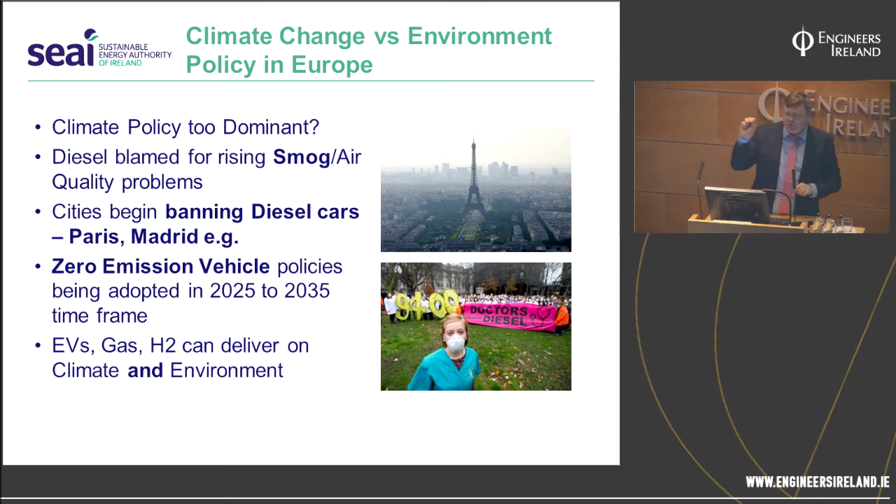They can all contribute to climate change and reduce the environmental impact and improve the air quality aspect. So what are the immediate things that the EU has started to do?

The first thing is there was a debate about how realistic the test cycles were. On the top graph, any vehicle built before 2017 was tested according to the new European drive cycle, with urban cycles and an extra urban cycle, where average speed doesn't get much beyond 60 kilometers an hour. So when you bought your car, it was tested according to this rigorous cycle. It was noticed that actual emissions were deviating by about 30%, and in particular NOx was deviating by a factor of 4 or 5 in some cases.

So the EU decided to change this and introduce a new, more real-world test cycle. In addition, after the vehicle has done that test cycle, they take it around and stick a device on the tailpipe to measure real-world emissions. Some deviation is allowed - post 2021, a deviation of 50% will be tolerated, but before then a higher deviation is allowed.

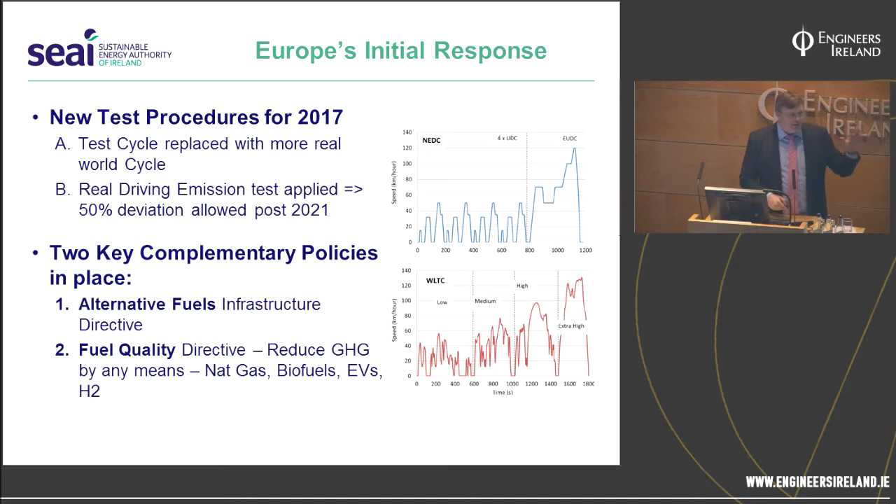The second thing is the Fuel Quality Directive has now been expanded. Basically, anybody supplying fuel for transport has to reduce the greenhouse gas content in that fuel - they don't care how, whether through a combination of natural gas, biofuels, EVs, or hydrogen. Those are the two things they'll be looking to get change happening with over the next couple of years. So let's look specifically now at EVs and how they fit into this equation.

We have an illustration of the energy efficiency of these vehicles. At the top we see the diesel vehicle, with typical efficiencies in the region of 25% - so the actual useful energy you get out in terms of transporting the vehicle, about 25% of the diesel energy put into it.

If we look at the electric vehicle, the power station combination - representing renewable energy, natural gas, coal, or whatever - has an average efficiency of about 45%. About 10% is lost transmitting that electricity to the consumer, but the electric vehicle itself is hugely energy efficient, with regenerative braking, and the battery itself is also highly energy efficient. Overall, you total that up and get about 30%.

So we can say that the electric vehicle, if we make the grid cleaner each year, will have emissions that reduce each year. The diesel car, as it ages, will have emissions that rise each year as it gets less energy efficient. So with this car, each year there's the potential to have fewer and fewer CO2 emissions associated with it - that's excellent news.

An illustration here of hydrogen, just for completeness. In Ireland, you have two ways: you either manufacture the hydrogen from gas or from coal, or you make it from electrolysis. Since we don't have huge reserves of gas or coal, if made from electrolysis, this is the kind of efficiency you'd get. Then you've also got to compress that stuff up to about 700 bar to get it into the car. The fuel cell is less efficient than the electric vehicle.

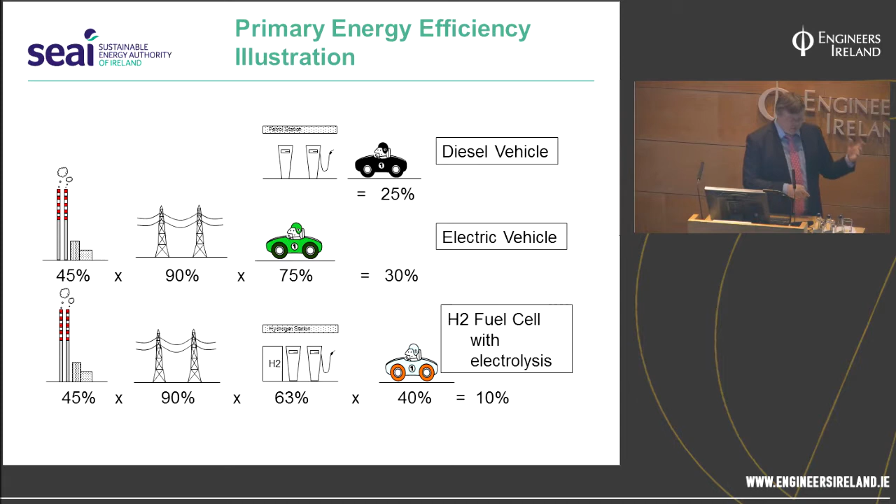So we're not going to talk about this, we're going to talk about electric vehicles now. We're going to look at some of the technology, just the basics really.

So this is a lithium ion cell. We have our anode here on the side, the cathode over here. In discharging mode, what we have is a graphite crystal almost, shown here to represent a crystal structure. The lithium ions are actually inside the crystal structure. If you had something like a lead battery, the actual electrode, all the action is happening on the surface, and the electrode gets dissolved in the process. This thing stays in place here.

The ions, so what happens is you've got two chemistries here. You've got the lithium carbon chemistry here, and over on the other side then you've got something like permanganate. So they've got two different electrode potentials. The electrons want to move across to this side to complete the reaction, but they can't move through the electrolyte, so they have to move outside the circuit to complete it over here. So once you turn the tap on here and make the connection, the electrons start to flow this way, the ions start to move across here, complete the reaction on this side, and that's discharge.

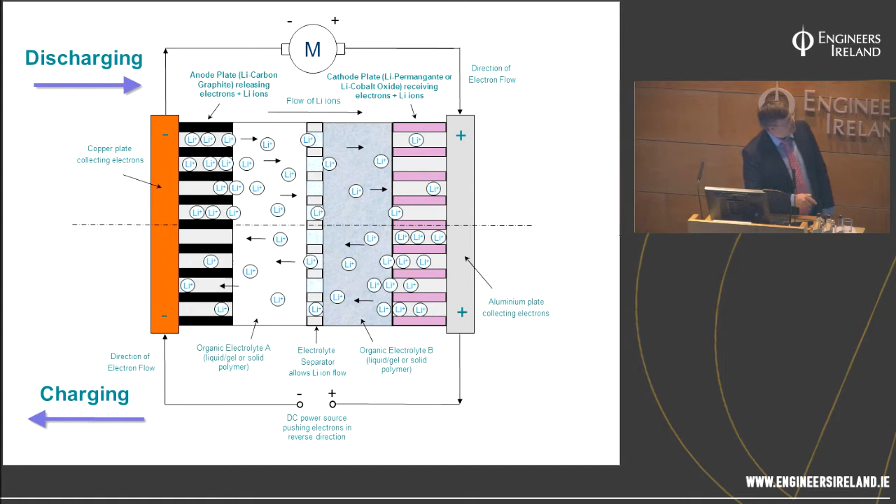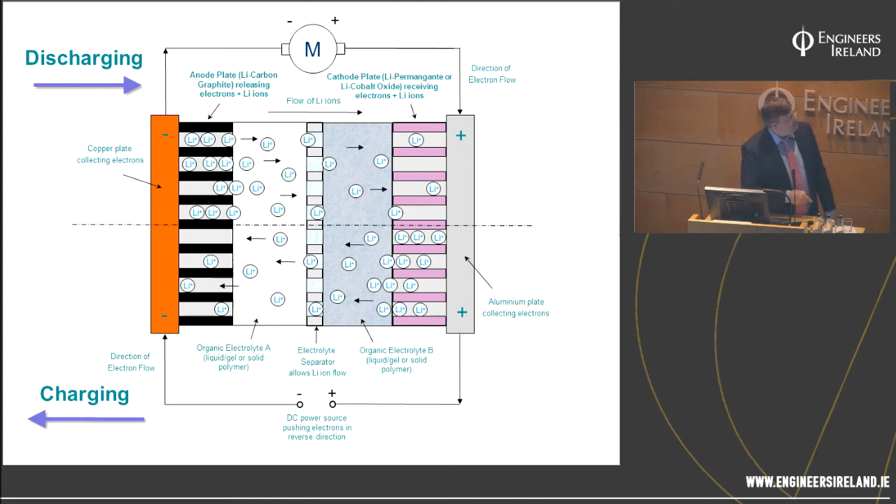So again, you have another metallic crystal on this side, going inside the crystal structure itself. And then when you want to charge it, you attach a voltage in the opposite direction across it here, and this drives the positive current this way. So the positive current is going that way, the electrons are going that way, and in charging you're going in the opposite direction, and they fill up again here. And this process happens to be very efficient, so it makes the lithium-ion batteries very efficient.

So if we look here, in terms of the cell voltage, the basic chemistry, each cell is able to create about 3.6 volts, as opposed to 2 for a lead acid. Voltage is energy per charge, so that means you're almost sending twice the energy for each electron that goes down the wire. So it reduces the losses and all sorts of things within the battery itself - the I-squared losses can be lower and things like that.

In terms of energy efficiency, if we look at the round trip efficiency, the energy you're going to get back out is about 93% compared to 75% for the lead acid. In terms of depth of discharge, of the volume of energy in that, how much of it can you access? You can access 85% of what's stored in the lithium-ion battery. In the lead battery, 30 to 50%. So you're carrying around this dead weight, energy you can't access - 50% of that thing you can't get your hands on.

And then, as we said, with the electrodes being part of the chemical reaction in the lead acid battery and the processes in it, we see the number of charge-discharge cycles between 500 and 1,000 for a lead battery, between 2,000 and 5,000 for a lithium-ion battery.

And here's the other thing - lead batteries don't like to be partially charged. Once you start the process, you've got to finish it right to the end. This is not the case with a lithium battery. You can partially discharge, partially recharge, so it's far more convenient for use. And they charge a lot faster as well than the lead batteries.

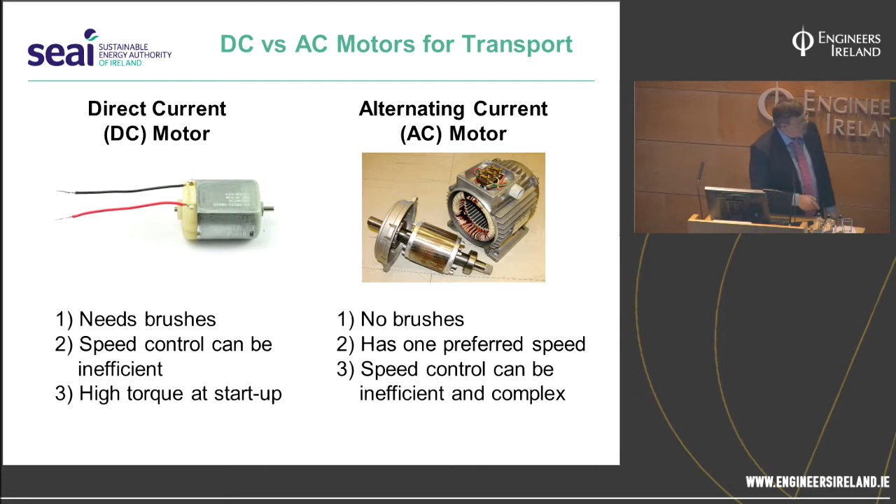So these power electronics have been developing over the last couple of years, and these are the same things that have enabled variable speed synchronous generators to be used in wind turbines as well.

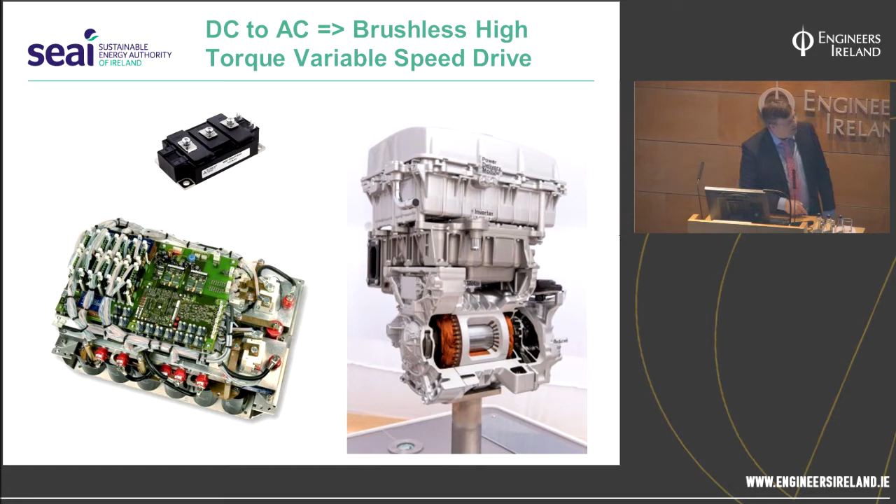Just to give you a practical example of what it looks like, this is the motor from the Tesla - this is actually, so they have all that variable speed control that you've seen there. Inside here is the rotor shaft, again very, very close. This is an induction motor, actually, so this one doesn't use rare earth magnets - they've chosen a different path. But interestingly, the new Tesla car will use rare earth magnets, so they're actually dropping their own idea, if you like.

That's what it looks like. 270 kilowatts is the power output, I tried to find a weight figure, I think it's about 32 kilograms I've seen. And just to give you a comparison, this is a 2.5 litre petrol engine - 270 kilowatts is the stated output, about 183 kilograms.

Look at the work and effort gone into building that engine there. Here are the Tesla motors installed. You can see it's a very neat power chassis, if you like. This is the actual battery pack stuck in here underneath, with two of these motors stuck in here. You can get an idea of the scale with respect to the wheel. So it's enormous power stuck in there. It's huge, very neat and tidy.

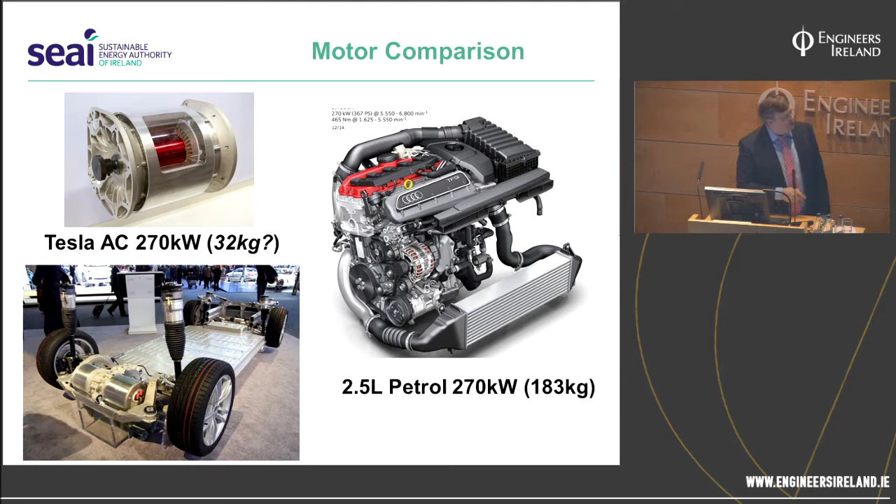So overall, you've seen what the cells look like. They shouldn't be that difficult to mass manufacture, right? There's a lot less work in building these things compared to this, so these should be cheaper as well. It's simply a question of volume. Once the volume of these vehicles gets up to a sufficient level, they're going to be far cheaper than combustion engine vehicles in the future.

So there we go, going back now to see what's going on in terms of Ireland's market. This is from SEAI's data. We've taken the average price of every Leaf that's been sold. This is the price after subsidies have been given, and we give about 10,000 in subsidies in total, so you can add 10,000 onto that to get the unsubsidized price. We see about 31,000 starting off in 2011, dropping rapidly.

Now we're looking at what's going to happen next. The other curve here is the price of the cars, and the far side is the actual NEDC driving range, the technical driving range of the cars. We started off at about 175 kilometers when the first Leaf came in. They started manufacturing it in Sunderland, cut a bit of weight out of the car, and with the same battery pack managed to get 200 kilometers out of it. Then the first increase in battery pack size gave you a 250 kilometer car.

And now the new one, coming out in January or February of next year, expected range about 378 kilometers. Not sure what the price is going to be yet. James, I hope you're going to be nice to us. You can reduce that bar anyway, I can tell you. Thanks, James, that's great.

So the man here is going to decide what this car is going to cost in the country. This car coming out in 2018 is going to have CHAdeMO fast charging. The one they're bringing out the year after, I don't know if we're going to have it in Ireland, hopefully we will, is going to be CCS, the European fast charge format. So we have a legacy of CHAdeMO, we have to accommodate those vehicles, so they're hedging their bets here. The second car coming out is going to have an even bigger battery pack, maybe 475 or 480 kilometers, we don't know yet.

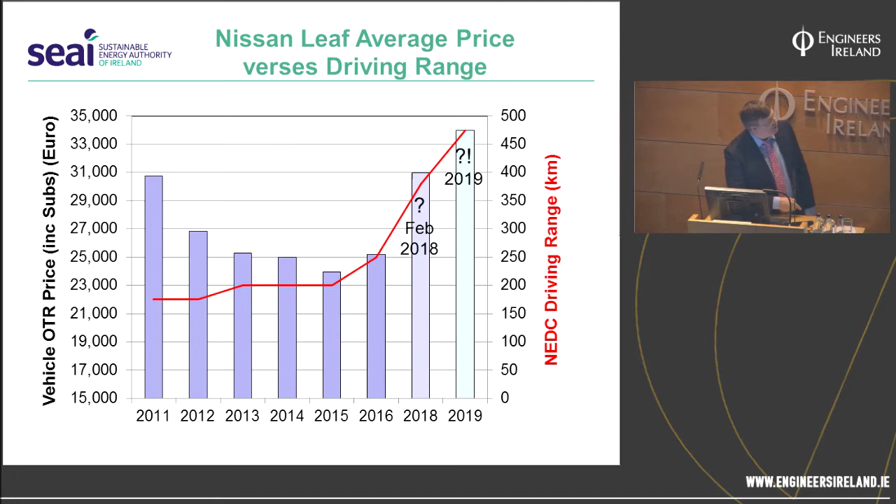So now, what's actually been happening in terms of sales in Ireland? When we say EV, we mean battery electric vehicle, but we also mean plug-in hybrid electric vehicles, and we've been given grants for both types. The BEVs are down at the bottom in blue, and the purple are the PHEVs. We've really seen growth in the PHEVs since BMW started producing their 3 Series and 5 Series in PHEV format. Up until then, it's been all the Nissan Leaf really driving the whole thing ahead.

And now we're starting to see this phenomenon: EV imports starting to rise. These are the number of registrations per annum in the country. About 3,600 cumulatively on the roads if you total it up. The split is 80-20, 80% of them battery electric vehicles, and we want to maintain that because the environmental benefit from PHEVs is uncertain. It's down to behavior, whether the guy is diligent enough to plug it in every night, whereas the BEV driver has to plug it in every night. So we're pleased with this.

Now, of course, the euro sterling exchange rate is doing the damage here. It's not just for EVs, it's also harming car sales in general in the country, as a consequence of Brexit uncertainty.

So there we have it. What are the manufacturers telling us about the future? So these are all statements from manufacturers.

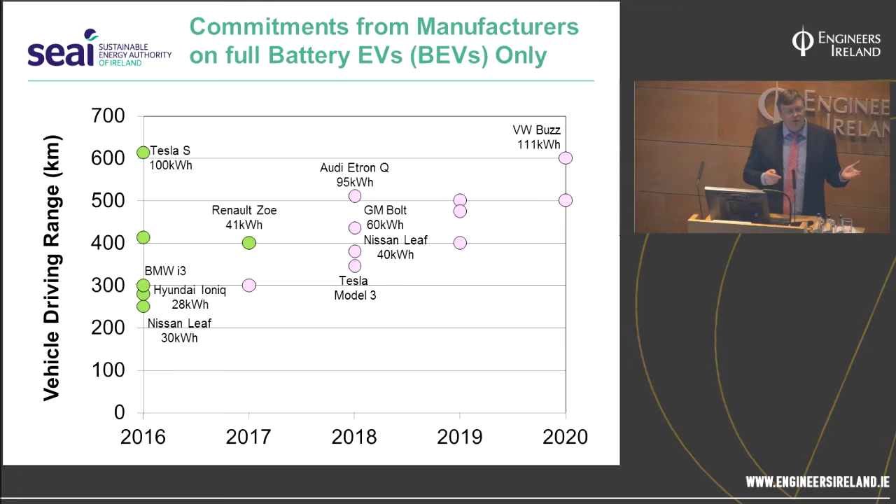So we're seeing a general trend. It's not unreasonable to assume after 2020 that the batteries are going to be in the 100 kilowatt hour range size with a driving range of 600 kilometers. So that's what we're looking at going into the future.

How fast will the cars be charged? This is the next statement again from manufacturers. So we have power here - how much power can you get into that battery - and then we have dates along the bottom. So down the bottom here, we have about, I think, 5 kilowatts here.

So if you charge your car at home, you can charge it at a rate of about 5 kilowatts, let's say. Your house is able to take about 14 kilowatts, based on a 63 amp fuse. So that's what you can do at home there, okay? The street chargers work at about 22 kilowatts, and then our current fast chargers are 50 kilowatts.

Now, the Nissan Leaf can take - most of the cars out there can work at this 50 kilowatts. We know that the Ioniq, the one that's out there on the roads, is capable of 100 kilowatts, I believe - they're using polymer batteries. But anyway, this is my own test here. I took an Ioniq and I brought it into the petrol station, nearly empty.

In 30 minutes, I got 170 kilometers range on it. I checked the computer to see did it actually come out - it all totted up fairly accurately, actually. I was really impressed.

So the proposal now is to increase the CCS and the CHAdeMO fast charging standard from 50 to 150 kilowatts. And already we see 2 manufacturers, Volkswagen and Audi, committing to vehicles that will charge at that rate. If we took that pro rata, very roughly, you're looking at a 10-minute charge for that same range, 10 minutes to get 170 kilometers.

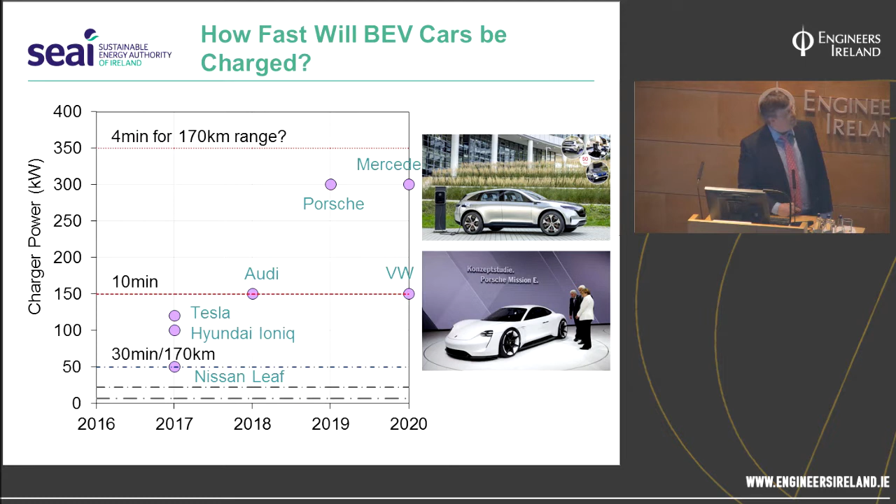So I'm not going to say any more, you'll hear a bit more from Joe now later on. And really that's it, so you got a smattering of everything there - you see what's going on, what's happening in Ireland, and where the future is taking us. So thanks very much.

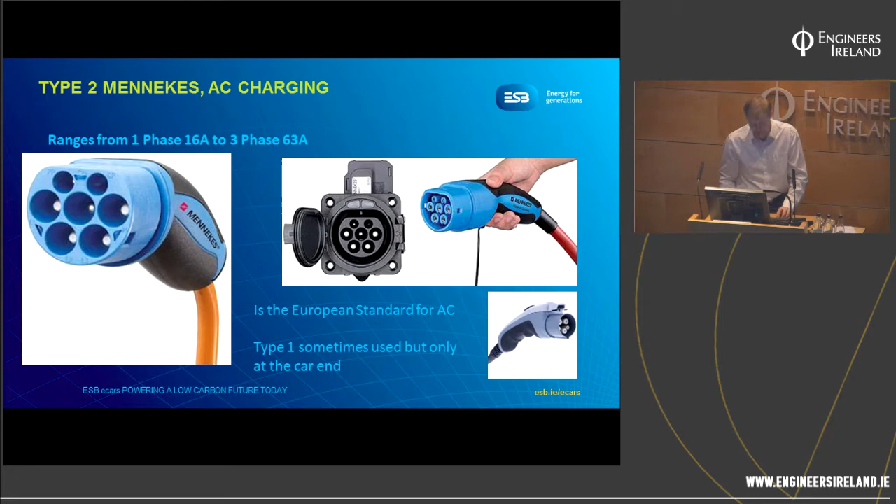Following on from that, we have the CHAdeMO connector, which was developed by the Japanese manufacturers for fast charging using DC. This was the first DC connector for EVs and was used by the Nissan Leaf, the best-selling EV with 300,000 cars around the world today.

You'll see a few variations of the CHAdeMO connector out there, as shown here. The early CHAdeMO connector from Yazaki, here on the left, was generally found to be difficult to use, but other manufacturers developed much improved versions, and today you're more likely to come across these.

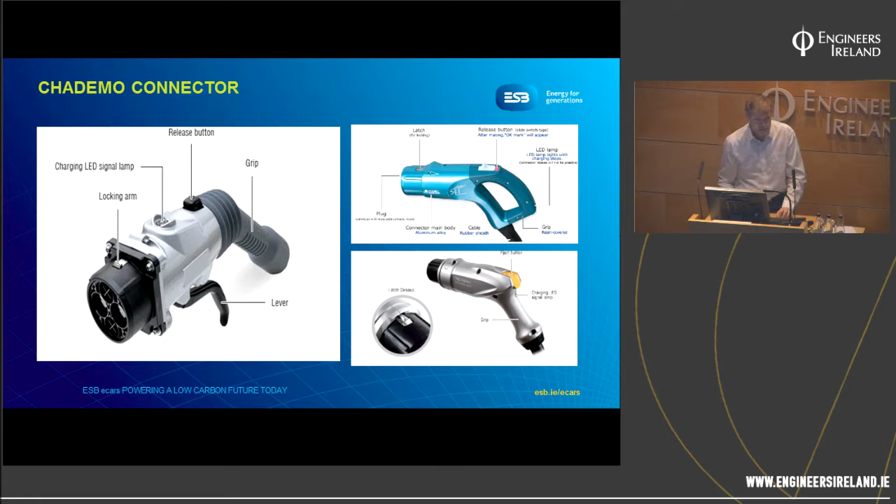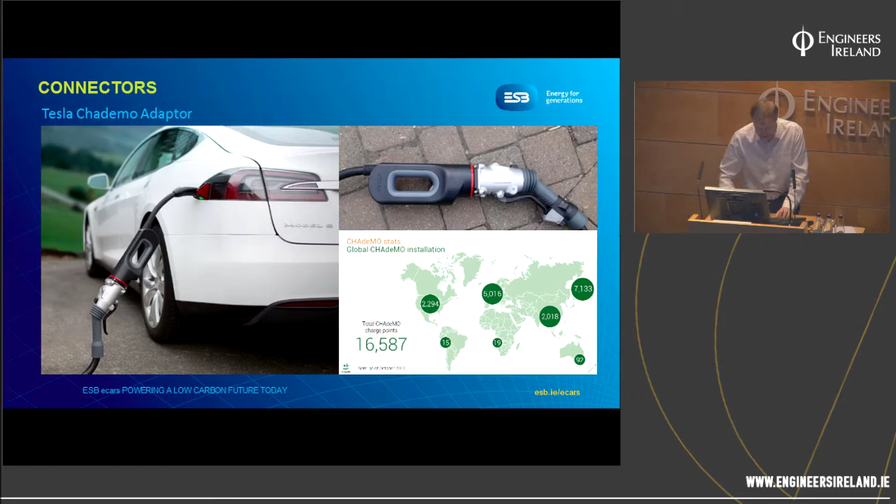Tesla, one of the main disruptors in the automotive world with regard to EVs, has developed a proprietary connector which they use themselves. So they have developed an adapter so that they can take advantage of the CHAdeMO charge point. This opens up the vast number of 50 kilowatt charge points to Tesla drivers.

Then moving on finally to CCS, or sometimes referred to as combo. As the name suggests, the connector is a combination incorporating both AC and DC. There are 2 variants, one for the European market, as Type 2 is the European AC standard, and Type 1 for the American market. This alternative to CHAdeMO is driven mainly by the German and American automakers.

The first public station appeared in June 2013 in Wolfsburg, installed by the Volkswagen Group. In Ireland, ESB introduced CCS back in 2015.

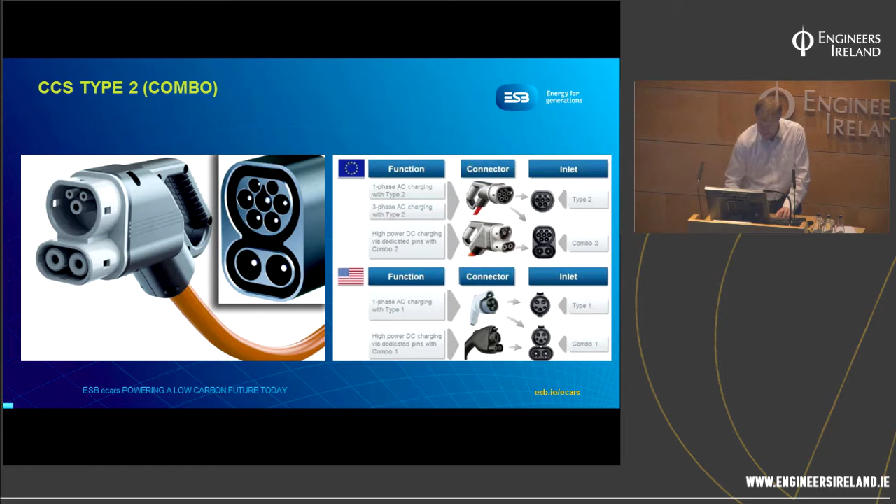So in Ireland, when we started introducing CCS to our network, we took the decision of applying multi-standard stations which could support both CCS and CHAdeMO, as well as fast AC. The reasons behind this is because we wanted to continue to support all EVs, and this has been the trend across Europe.

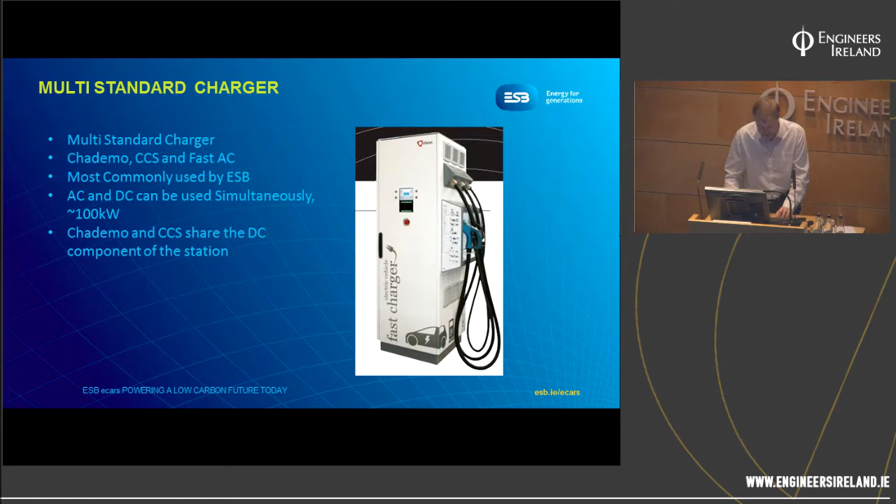Now, just to move on to what's coming down the line, in terms of the future for EVs. Battery energy density has been increasing, while at the same time the cost has significantly dropped since 2009. Putting that into context, in 2010 the Nissan Leaf was launched, and at that time the cost of a kilowatt hour was just under $1,000.

Today that's under $150. This can be seen reflected also in the battery capacity changes in EVs currently in the market, with kilowatt hours increasing within the same physical body of these cars.

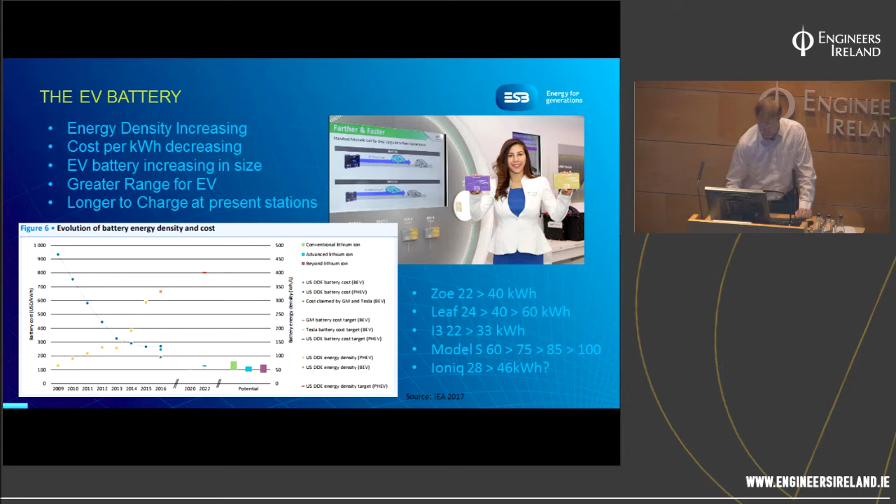Now, with bigger batteries, charging times at the current power levels will grow. So there's been a trend moving towards higher power charging. And currently Tesla's superchargers provide power levels of 100 to 130 kilowatts.

The CHAdeMO standard is moving to increase and will be capable of providing 100 to 150 kilowatts, with CCS also looking at going to 350 and even 400. At these higher levels, charging times close in on the time taken fueling a diesel or petrol car.

One of the biggest challenges for the manufacturers in getting to this was the cable that goes between the station and the EV itself, which would not only need to deliver the high power levels, but also had to be light, flexible, and sufficiently cool to handle for the user. Thus, this drove the need for higher voltages as well as high currents and now liquid cooling.

The other problem being faced as EV numbers grow is the number of points available at a site. Most of them today would only have 1 or 2 fast points, leaving little or no room for redundancy and increasing the likelihood of long waits. So, along with the move to higher power, these next generation chargers are moving towards multi-points and dynamic power management. Due to this and other reasons, the power components are being separated from that of the customer terminal.

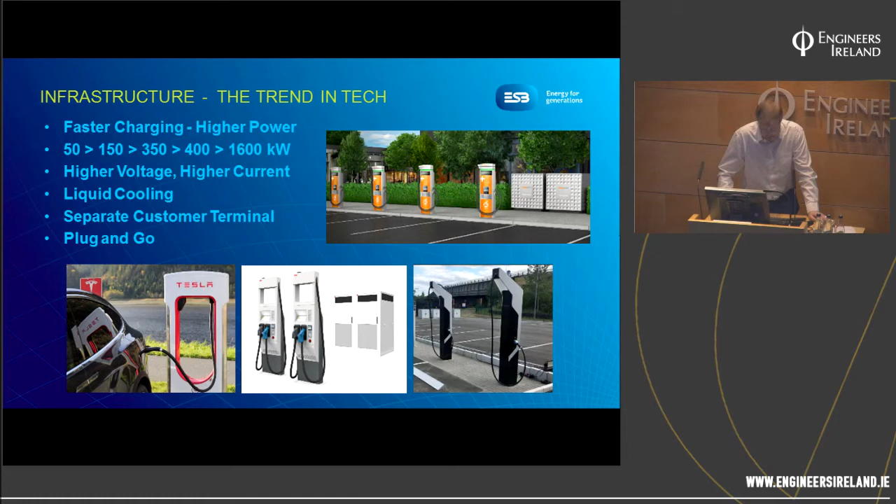Now, infrastructure for larger vehicles. There has been a number of projects like that of the E-Highway by Siemens, run in California and Sweden, using overhead contact lines and hybrid electric trucks with pantographs, connecting to power them while on the move at speeds up to 90 kilometers per hour.

In this area also of electric buses and BRTs being developed, with stationary pantograph charging systems operating at levels of 150 kilowatts to 600 kilowatts, providing for today's demands for clean air in our cities.

And most recently, Tesla unveiled the Tesla Semi, along with their plan to provide mega chargers worldwide. These are expected to be in the order of 800 to 1600 kilowatts per point.

And finally, just to touch on wireless charging of EVs. Wireless charging has been around for a while. We all know the humble electric toothbrush, and we're also starting to see it becoming available on new mobile phones.

This is an area where automakers have begun to offer vehicles equipped with wireless charging. While it is unlikely to be coming to public infrastructure in the short term, it will begin to appear in people's homes with the convenience it provides.

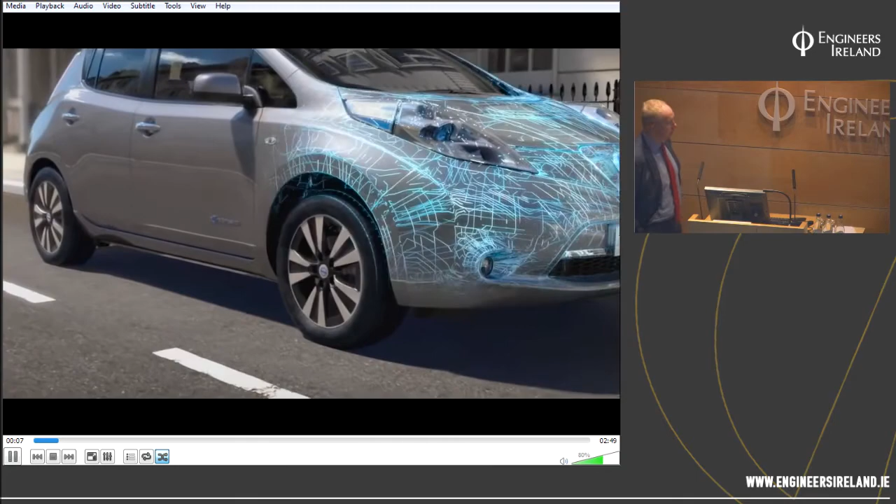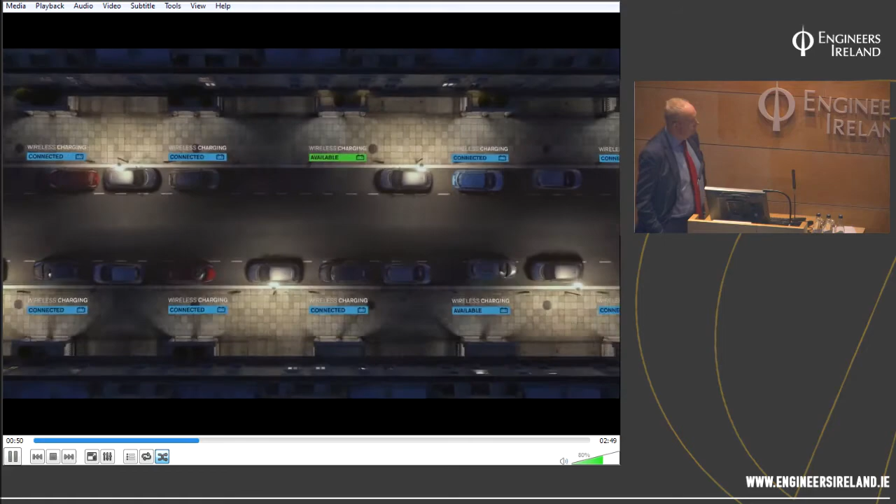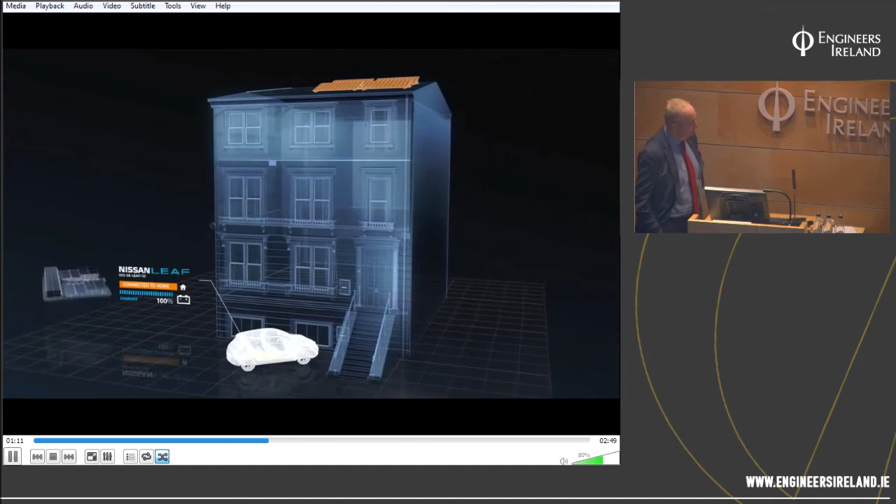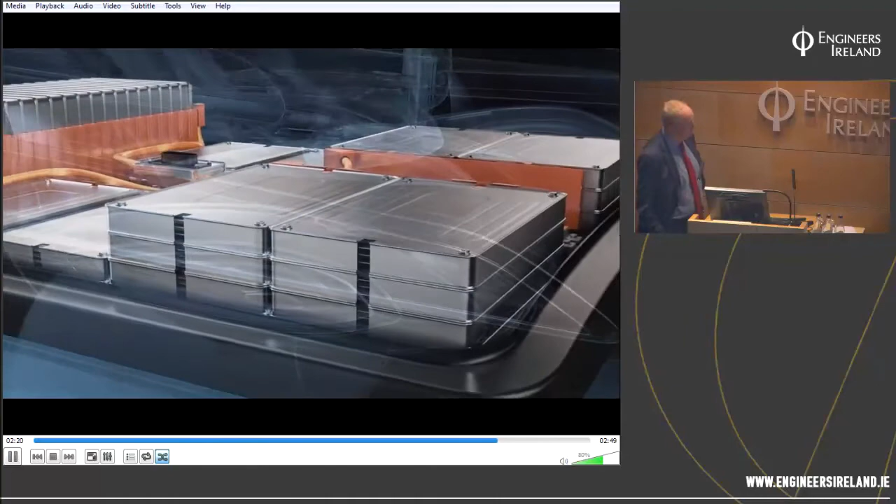We believe the future is ahead. So what will the fuel station of the future look like? We think it could be this. Charged by the sun, wind and the oceans, cars could empower people to store and then distribute renewable energy. So what can we do to really shift the balance from fossil fuels to renewables? Through our battery and intelligent drive technologies, we may have some answers. With Nissan's wireless charging and universal connectivity, our vehicles could autonomously charge themselves and then repark so another vehicle on the street could use the same bay, all while you sleep. And come the morning, your house and the grid could draw energy straight from your car, powering your home as you start the day. This is not just any street. This is a smart street. The cars, houses, roads and grid are all in sync, connected. Recycled Leaf batteries can be turned into smart home storage so that no clean energy goes to waste. And it doesn't stop there. With zero emission technology, when you pull up at your workplace, you could drive straight into the office. An automated parking system would whisk your car away to be recharged, or the battery could even be used to power your office. The whole city could be connected. What if clean energy was so abundant that it became a free commodity to be shared amongst the city and its people? Our cities have the power to be transformed. Places once occupied by car parks and fuel stations could be replaced by green spaces, building a cleaner, kinder urban environment for our children and our children's children. At Nissan, we want to unlock the true potential hidden in our cities. And we believe that zero emission and piloted drive technologies could be the key. What if the fuel station of the future wasn't a fuel station at all? We believe the fuel station of the future is your home, your street, your city, your car.

So, a little bit of future gazing, but if I can get back to the present tense, help. Here we go. So I suppose that's a vision of where we could be going, and I'm definitely going to ask for assistance here now.

Pressing escape furiously. So, I think she brought it over here. Yeah, yes, there we go. Thanks very much.

What I'm going to cover today, as briefly as possible, is the context of EVs in Ireland. Ireland will be a world leader in the take-up of EVs, that's in the programme for government. I'll get this on slideshow, sorry about that.

And in Ireland, what does a world leader mean? Well, about 5 or 6 years ago, it meant having 230,000 EVs on the road. Now, I'm afraid it means having 20,000 EVs on the road by 2020. The reason for that is not because EVs are very nice, but it is key to meeting our climate change commitments, particularly those we recently signed up to with the Paris Accord, and our failure to meet those targets. There was some pretty bad news yesterday about CO2 emissions and where we're going there, which has the capacity to result in unquantifiable fines, really. Joseph Curtin, an academic in UCC, has calculated that the exposure is between 3 and 6 billion.

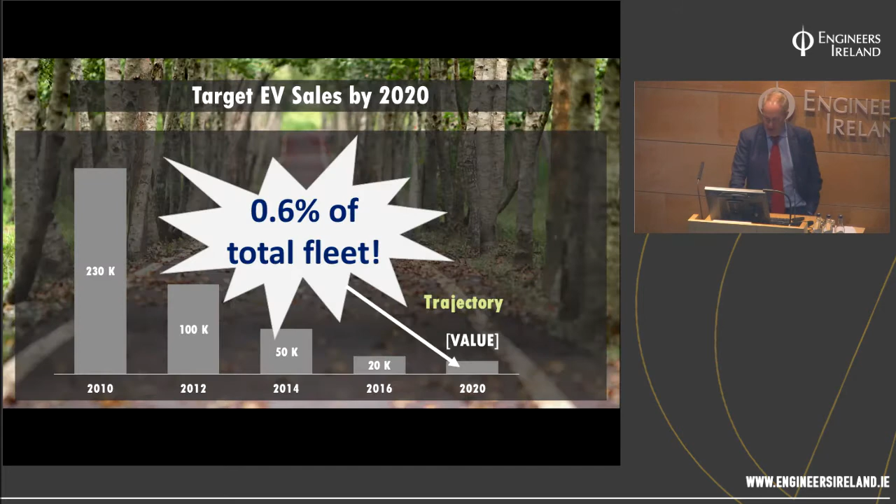It's a function of Brexit and a thousand other things, so we just don't know that number. That would take us on that trajectory to about 14,000, substantially less than the 20,000 we're targeting. But I think there's ways that we can address that.

That would represent 0.6 of the fleet, which is a little bit short. Now I know you're engineers and not accountants, but help is at hand, and one of those big helps has been the very generous provisions that came in budget 2018. I'm not going to walk you through the numbers, but essentially accelerated capital allowances, particularly for a sole trader, confer massive benefits, probably a saving of almost 11,000 euros if you're a purchaser of a Nissan Leaf at a ticket price of around 25-26,000.

If you work for a company and get a company car, there is zero benefit in kind. This is a massive saving, a huge incentive that came in the last budget. Zero benefit in kind for a car the equivalent of a Nissan, so that might be a Golf or a Ford Focus. Normally you'd be paying tax of 360 a month if you got that as a company car by way of benefit in kind. Zero if you have an EV. Those are two huge savings, very progressive policies, and I have no doubt they'll drive the adoption of EVs for those lucky enough to get one.